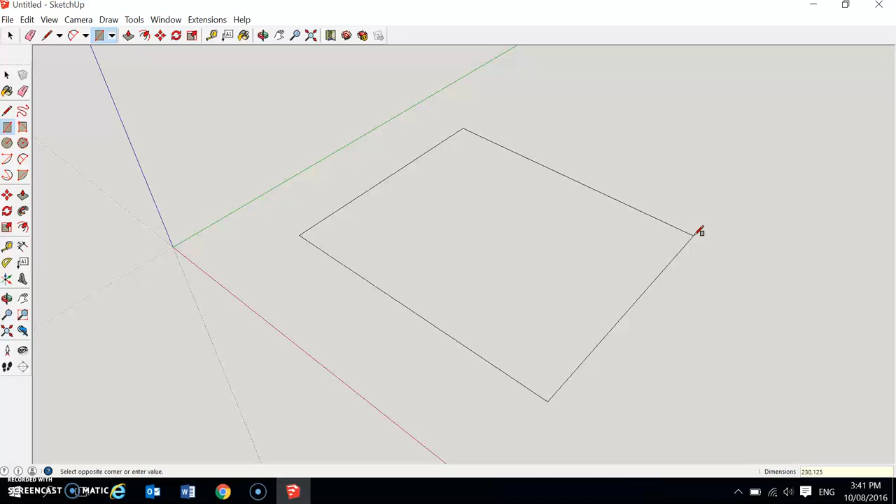So I'll do that again. 230. And then we're going to separate that by a comma and put in, say, 125. Then press enter and it draws the rectangle. It's pretty small, so we're going to click on this zoom extents button here and it'll zoom right in so we can see our drawing.

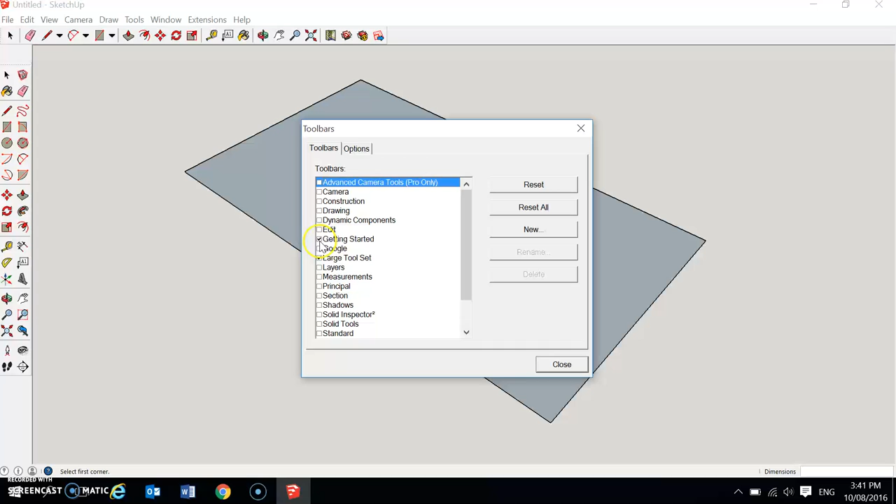Okay, the next thing we're going to do is to click on the offset command. Now if you don't have that there, what you need to do is go to View, go to Toolbars, and if you click on Large Toolset, you can see my large tool sets here. It'll appear in this little column here. So just click on Large Tool Set and then close. Alright, so I've got it in two spots. So I'll choose this one, Offset.

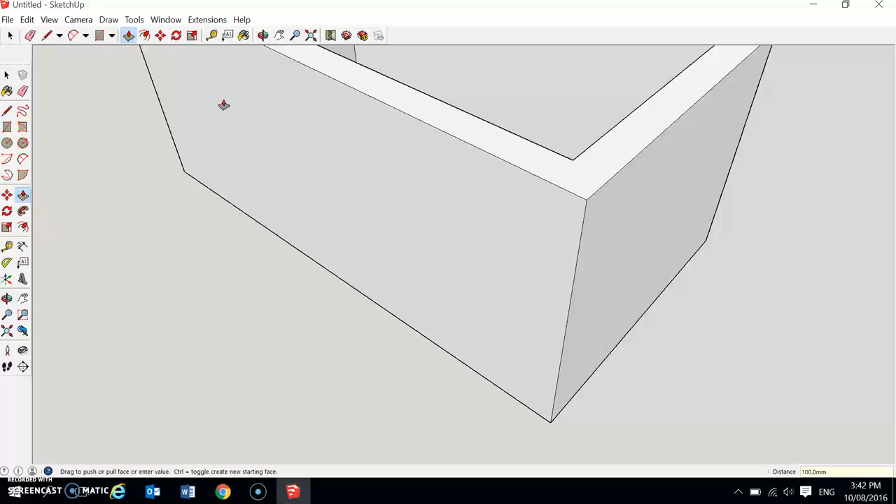Click inside the rectangle and drag in, and then type the thickness of the timber you're going to use. So in this case it's 12 millimeters. Press in 12 and press Enter. And now you've got the thickness of your timber for the box. Now we could just pull that up to the height, say it's 100 mil. But we haven't actually detailed any joinery and we want to do that. So I'm going to go Control Z to undo. And I'm actually going to draw that in.

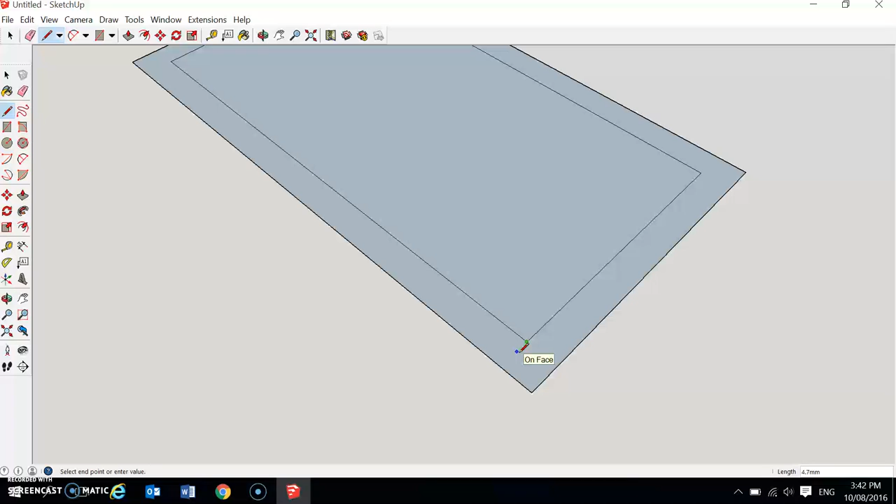So I'm going to pick my line tool and I'm going to draw in my rebated butt joint. So I'm just going to go on face, connect at the end point and just type in the distance, which is going to be half the thickness of the material, which is 6 mil, and enter. Type in the distance and enter, and then click on the end. So there's the first part.

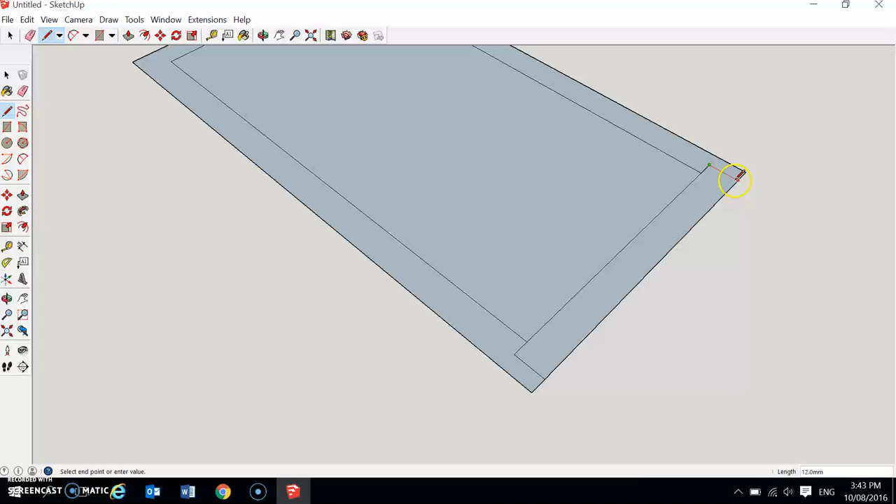I'll do the same on here. Now it should lock in at 6 mil because it defaults to your previous settings. So in this case it locks in. You can see it gets attracted and gives you an end point. I can do the same on this end as well. So I'm going to zoom in.

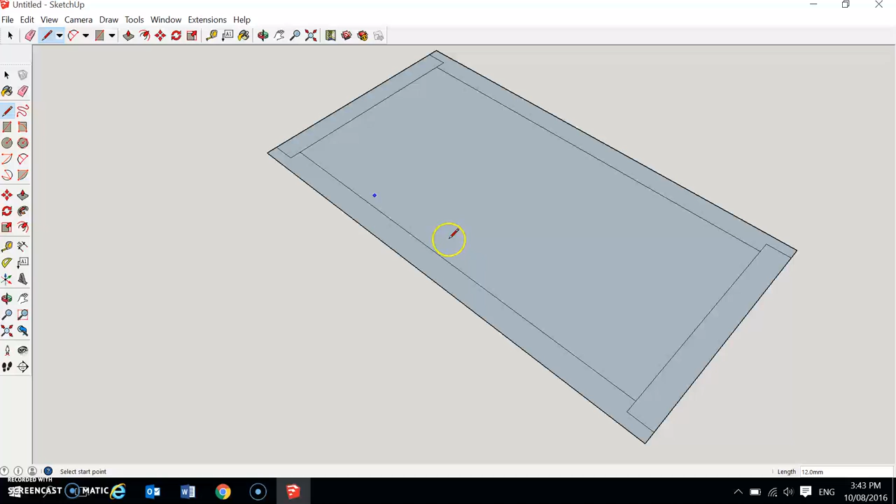From point, click. And I'll do the same at this end. On face 6 mil, so it's giving me the same distance. So now when I go to pull up, it will pull up individual components, so I can pull them as separate pieces. Okay, I'll just undo that.

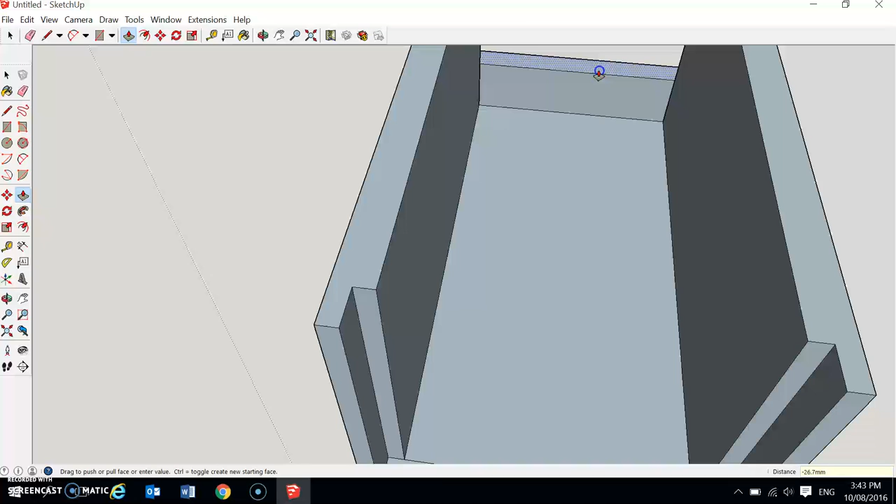I'm going to type, pull the two edges up first, 100 mil, enter, 100 mil, enter. And I'm going to pull up the end one, 100 mil. Now, if you wanted a sliding lid, obviously you're not going to pull up all the way to the top because you want the lid to slide in and out. So I'm just going to pull it up 10 mil from the top, so I've got enough room.

Sorry, 8 mil from, sorry, that's right. 10 mil from the top and then 8 mil from the bottom, so 18. So I'm going to pull that up 72 mil. So 72. Sorry, that should have been 82. Bad maths, 10 mil. Okay, so now I've got room for my lid to slide in and out.

Now I want to put the groove in. So I'm going to go to my tape measure and I'm going to go from the top down, and I want to come down 10 mil from the top. So I've got a nice thick bit of material there that's not going to break off. So I'm going to type in 10. And then obviously that's going to be the bottom of the groove there.

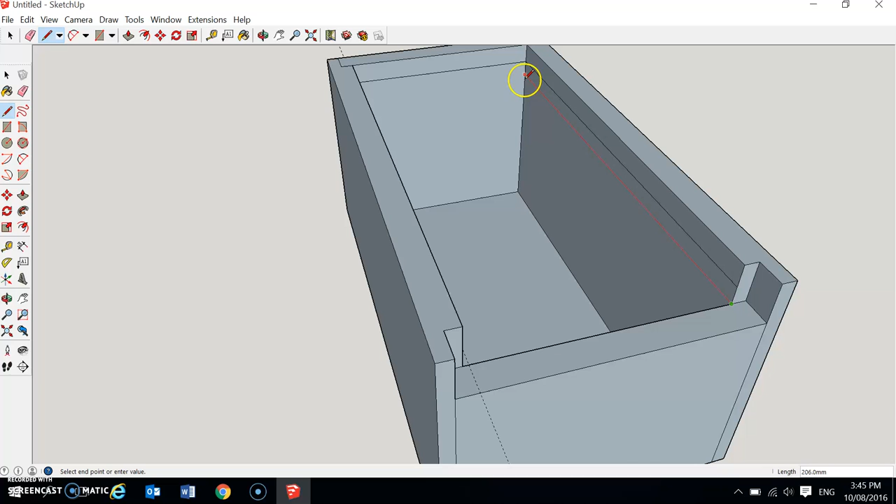So I'm going to go back to line and I'm going to draw a line on my first guide, and I'm just going to continue all the way around because the groove goes all the way around. Click. And when it's on the red axis, it's parallel. So now I want to do my bottom groove. So once again, it's on the red axis. Go around, in this case, it's the green axis. And should be back in the red.

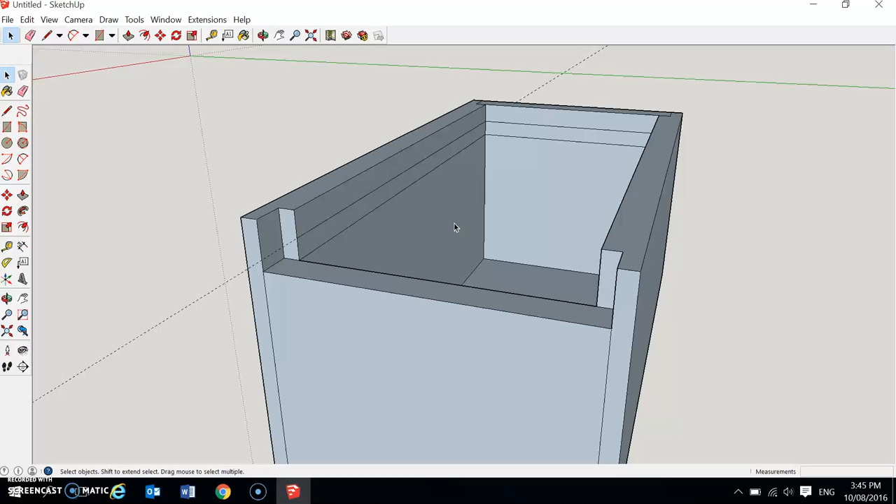Okay, so it's actually filled in the top, which is okay. I'm not too worried about that at the moment. If I want to get rid of that, I can just go to my selection tool, click that surface, and press delete. It gets rid of it. Okay, so now I'm going to push that rebate in because I want to put a groove in there. So I'm just going to go back to my push-pull tool.

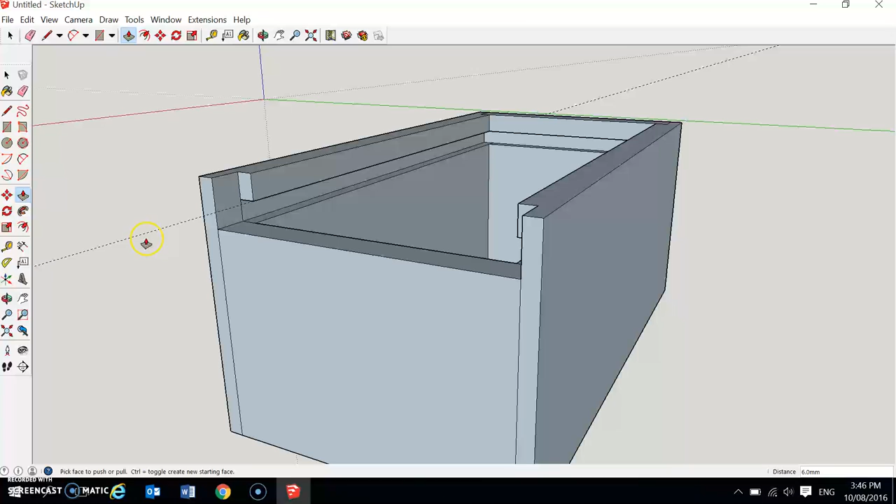I'm going to push in 6 mil, which is the distance of the rebate butt joint. 6 mil, I'm going to do the same there, 6 mil. Type in 6, and this last one, 6 mil. Okay, so now I have my rebate all the way around. I'm going to choose the erase tool to get rid of this guideline because I don't need it anymore. And I don't want to see this line here because it just doesn't look right. It shouldn't be there, so I'm going to get rid of that.

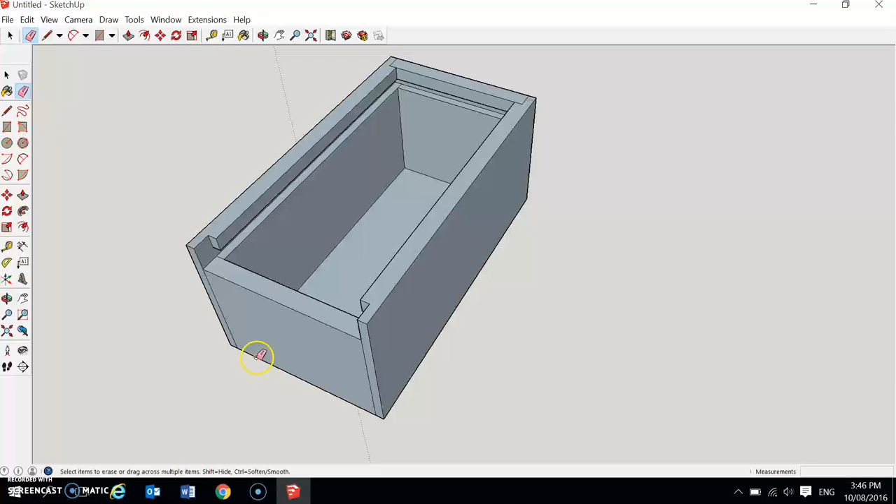And there I have a detail of my box with the joinery in and the sliding lid. Oops, I don't know why that happened, but I'll just close that. Later on, I can just come back in and draw my box lid. All right, so have a go at that, and then the next tutorial will show you how to put your box lid in. Okay.